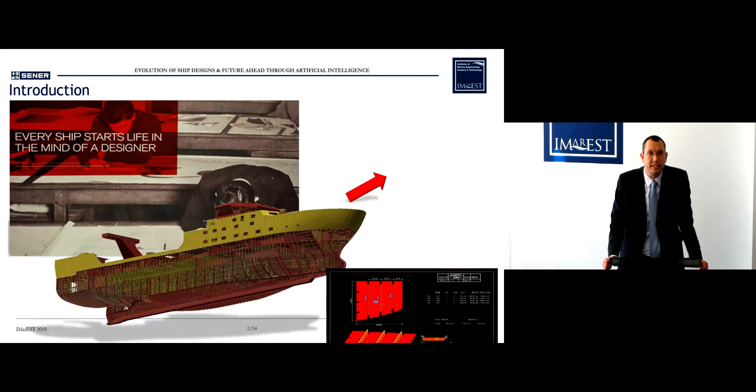The first thing I would like to mention is this slide, where I have a picture I took years ago in the Irvine Maritime Museum, close to Glasgow. In this picture it's stated that every ship starts life in the mind of a designer. I think this is the main objective of all the people attending this topic. All of us know how a ship needs to be designed, and the only thing we require is software in order to design in the best way this ship, boat, offshore platform, whatever structure we are going to design.

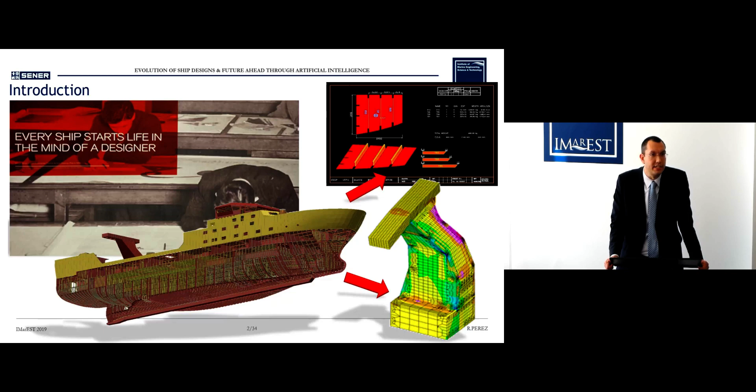So for current design, here we have people attending who are experts in finite element methods. Here we have a complete ship designed through software where we can see all the pieces, and all the bill of materials can be exported to a finite element solver. It can also generate all the outputs. So this is the traditional, current way to do things in the shipyard.

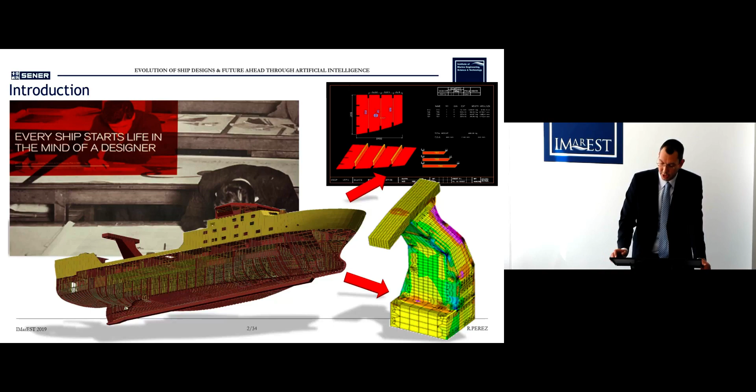So the aim of this presentation is to explain what the future is in terms of ship design. I'm going to try to carry out the presentation as quickly as possible in order to allow you some time for questions and debate.

So we are going to start with the past. Probably some of you recognize this photo I took in Portsmouth. Most of you recognize that it's the Mary Rose. Here we can see some of the elements that constitute the shell of the Mary Rose. So in the past, ship design was carried out through the experience of the master and the apprentices.

Here, for example, I have stated that the father of naval architecture, I consider, is Pierre de Bouguer, who in 1746 published the first book of naval architecture. It was the one called Traité du Navire, which, among other achievements, first explained the use of the metacenter as the measure for a ship's stability. This was the first person that started defining some aspects of ship design.

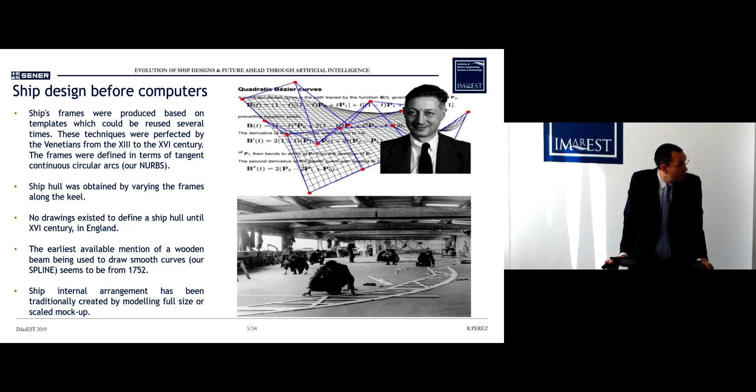So the right bottom picture is one I took from an old shipyard. It's the lofting room, where people could generate, I think this photo is from the first part of the 20th century, where they designed the ships at a scale of 1:1.

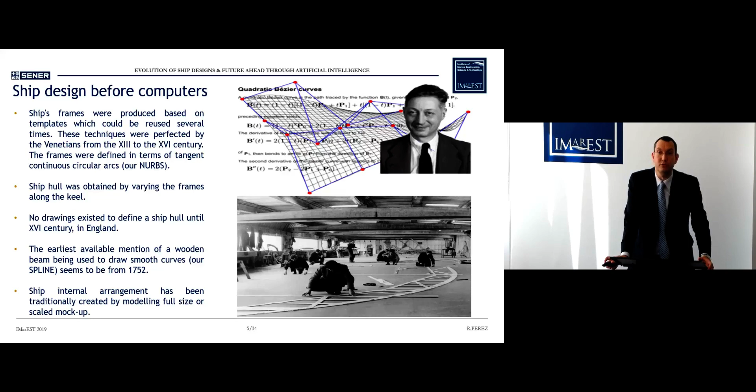Later on, as ships started being built bigger and bigger, they started using other scales, 1:10, 1:5, and there came a moment when there was not enough space to define all the lines of the ship, so they started using computers. So the first steps in the use of computers for ship design, we can say, have not been easy. I think the development of this technology has been moving through the years along with the technology of computers.

Probably some of the attendants here remember the blind punch cards and the magnetic tapes that were used in order to interact with the computer. It was in the 60s, 70s, where the interaction with the user was through punching cards or magnetic tapes.

The graphical user interface, videographic, computer-generated pictures, were from the late 70s, beginning of the 1980s, where people started defining the shape through a mouse and through an interface, alphanumerical interface through the computer.

In the 80s, they started using databases with easy-to-use modern access databases, with early search engines, spreadsheets, drawing programs. In the late 80s and beginning of the 90s, we have the birth of the numerical control machines.

This photo I took in another museum, where it was an example of a mock-up, a scale mock-up of an engine room from a vessel, defined at the beginning of the 19th century. As you can see, all the man-hours devoted in order to get a mock-up.

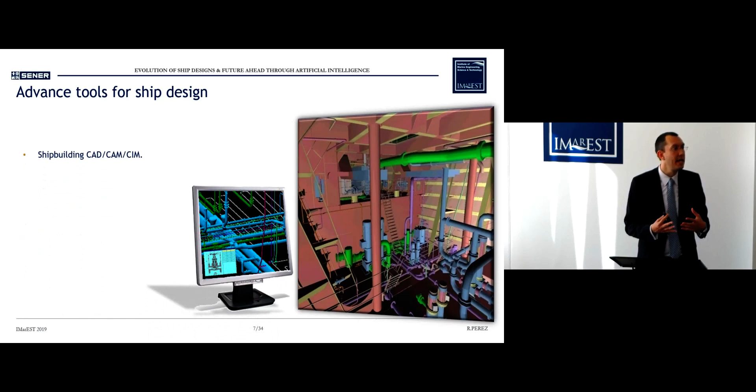This mock-up right now is something simple to create and managed by the technical offices. So the question we need to ask is why the technical offices and the shipyards are using software in order to develop the ship design.

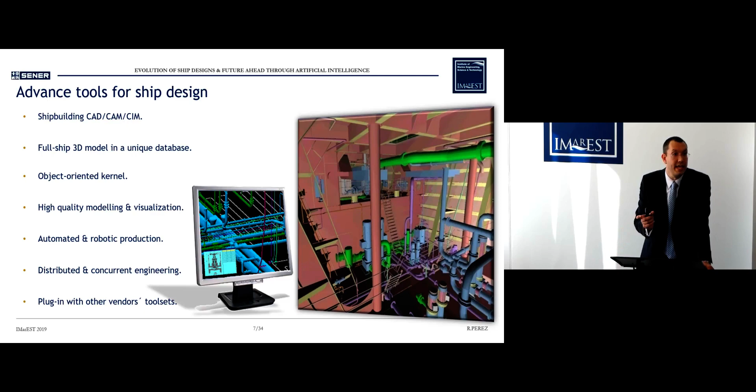So we can say that the aim of the advanced tools for ship design includes computer aided design and manufacturing. They are also engineering softwares used to manufacture all the information that we can get from the 3D model. We can have the full ship in 3D in a unique database in order to get access to all disciplines and have all the accuracy that we get from the data.

We have also object oriented kernel. We have also distributed databases. We have several advantages in the way we use the CAD system.

We have also high quality modeling and visualization, automatic and robot production in order to send information to the CNC, the control numerical machines, the bending machines, all the information that needs to be manufactured in the workshops. We can also have distributed and concurrent engineering.

In the past, the shipyard produced everything, from the engines to the ship itself. But right now, the shipyards try to reduce fixed costs and they subcontract almost everything. So now there are several actors playing the same game. We have ship owners, technical offices, shipyards, classification societies. All of them need to work in a collaborative environment, and this collaborative environment is done through concurrent engineering.

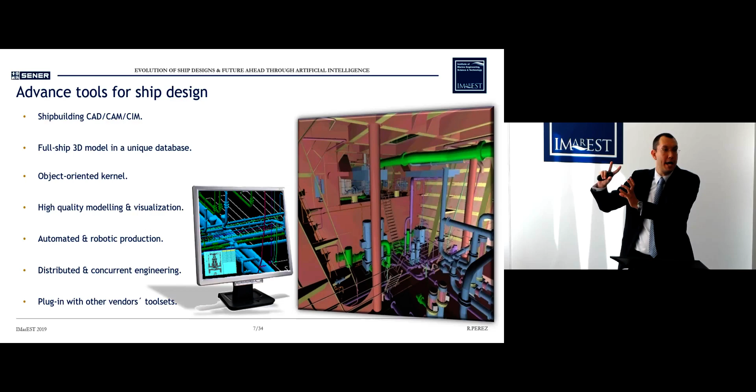It's also required by the software to have plugins with other CAD vendors in order to export to another finite element method solver. We can also generate information through fluid dynamics or computational fluid dynamics software. So we need to interact with each other. This is why we have advanced tools in order to design the different ships.

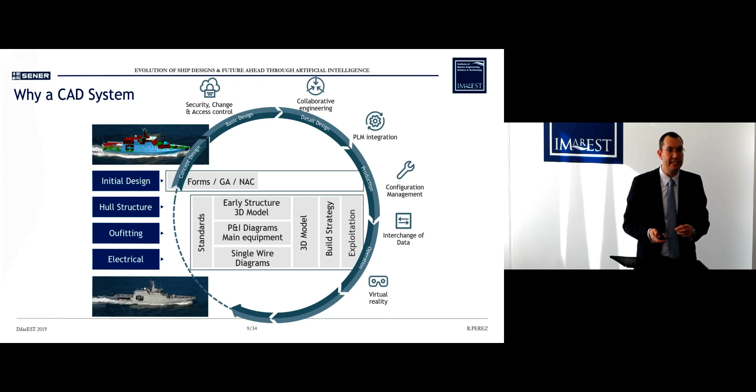So something that is quite important in the ship design is to get the outputs. In this slide, I have tried to put all the different outputs that we get from the different stages of the ship design, starting from the initial and concept design, through maintenance and operations, through all the basic design, detail design and production. The different design stages, depending on the country that we are, could change.

In Asia, in South Korea, for example, they name differently. What for us is the detail design, for them will be another type of the ship design. But here I have tried to place all the different stages of the ship design.

So from the initial design processes, we can generate from the hull forms all the damage stability criteria. We can define also the hydrodynamic analysis, intact stability analysis, power estimation, launching information.

We have from the basic design, we can generate all the major steel surfaces. We can also generate the general arrangement. We can generate also the classification information, the classification drawings for the classification societies. So in the detail design, we can generate the assemblies, we can generate the spools, isometrics.

So at the end, through the different ship design stages, we can generate all the information, always using software. I do not know any shipyard in the world that is not using software right now. All of them use software because it's the quickest and cheapest way in order to generate all the information for the ship design of the vessel.

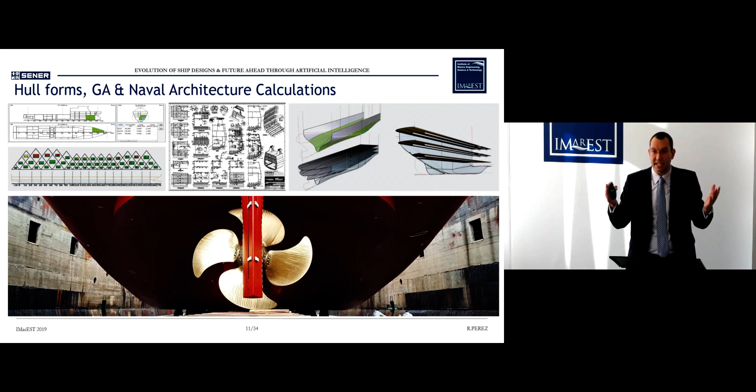So very quickly we can generate some of the information to produce the vessel, from the damage stability criteria on the left to the classification drawings to be classified by the classification society, and generate the hull forms. We can generate the structure, the outfitting, the electrical, in order to get a complete 3D model.

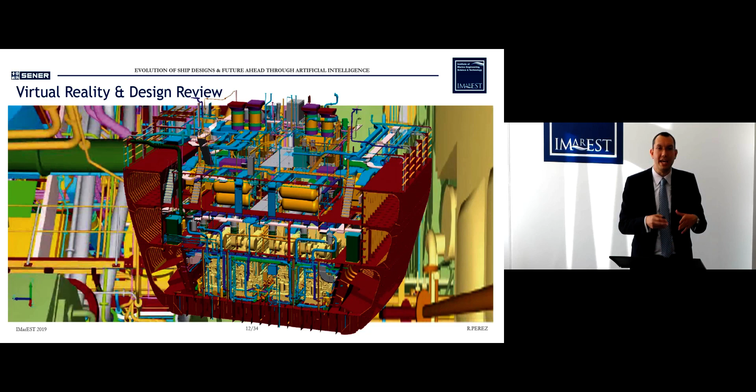In this 3D model we can interact with different elements and get the information that we require. We have also the virtual reality softwares in order to access the data in a simplified manner, with glasses, gloves, we can interact with the model, we can do some training, we can detect some errors, we can do the design review through these software applications, so we can handle all the information in a very easy manner.

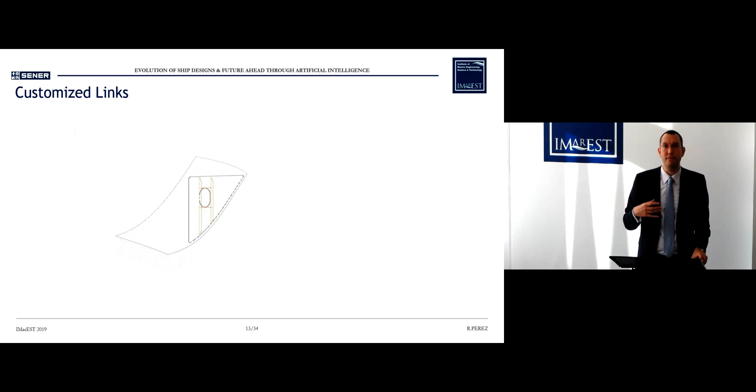As regards the ship design, we have also generated customized links in terms of generating information. Here is an example that I have created in order to see how we generated the information. We start generating the hull forms.

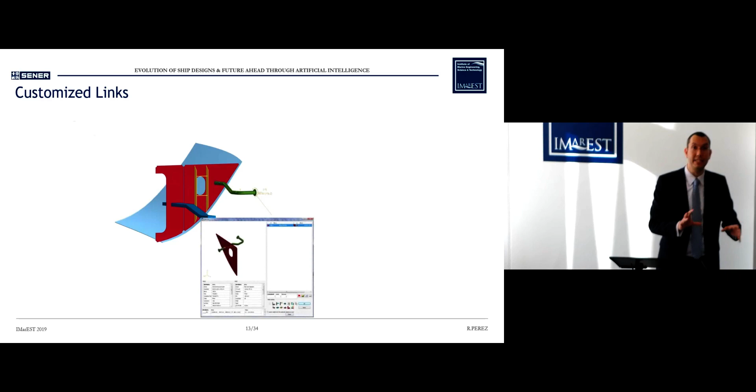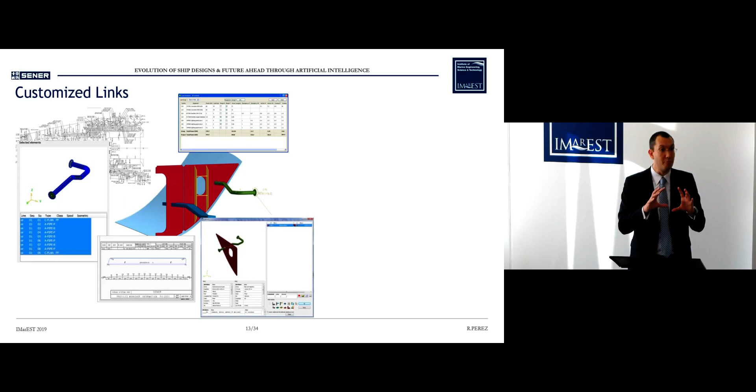After that we generate the shell, we generate the shell plates, we can generate frames, we can generate transversal stiffeners, we can generate information from the pipelines, from the HVAC ducts, we can generate clashes, collisions, automatically generate the penetration in order to allow a pipeline to penetrate into a watertight bulkhead.

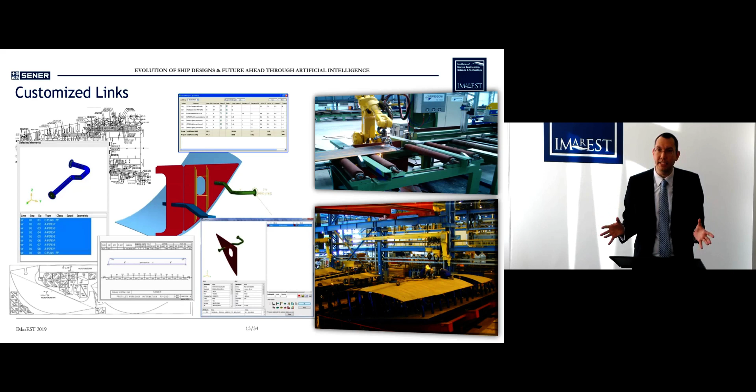We can generate the spools, isometrics, the nesting information, the profile sketch. We can generate the arrangements of the data. We can also generate all the bill of materials, all the information required for the CNC machines, and also information for bending machines or manufacturing the rest of the vessel. So this is currently how we get in the software and how we can manipulate information as it is shown.

So I need to go quite quickly. If we need to say what is the traditional way of working in terms of generating this information, we can say that right now the paper is vital, it's mandatory to generate this information. And what is the problem right now?

We have the technical office generate the 3D mock-up. This technical office sends to the workshop the different outputs, and the people in the workshop manufacture the vessel. What happens? Someone, the project manager, can realize that there is a problem between the mock-up and the outputs and the information that we have.

And sometimes, what is the problem? That someone is very angry because they consider that they have made a mistake. So there are mistakes that can produce a delay in the delivery of the vessel, and also it can be a high cost in terms of building the ship.

So what is in this case the consideration of the future? That probably the paper is not going to be vital, it's going to be a paperless design. We are going to generate the information using the new technologies. So the next part of the presentation is going to be about the future and embedding artificial intelligence inside the software.

So the first thing that we need to mention about the future is some words from Stephen Hawking. I think that was his last presentation in 2017 before he passed away. It was in Lisbon. If some of you remember, he was not physically in Lisbon, he was like a hologram that provided the conference, and he said that perhaps we should all stop for a moment and focus not only on making our artificial intelligence better and more successful, but also on the benefit of humanity.

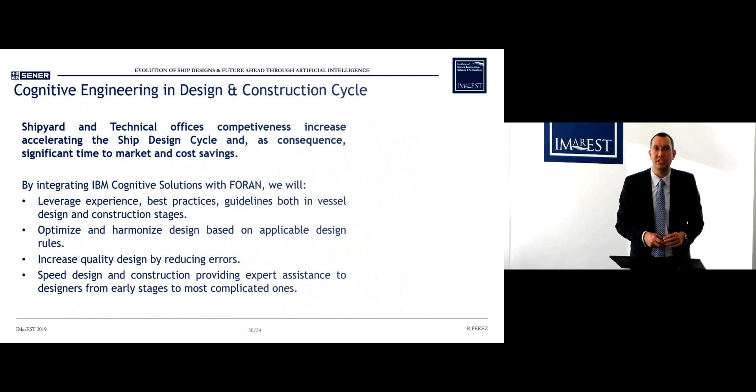At the end, this is probably quite high level, understanding what is required. Here is what we consider needs to be the definition of cognitive engineering in the ship design and construction cycle. The shipyard and technical offices, competitiveness increase, accelerating the ship design cycle, and as a consequence, significant time to market and cost saving.

How to do this? By integrating IBM Cognitive Solutions with FORAN. We will leverage experience, best practices, guidelines, both in vessel design and construction stages, also optimize and harmonize the design based on applicable design rules, increase quality design by reducing errors, and speed design and construction provides expert assistance to the designer from the early stages to the most complicated ones.

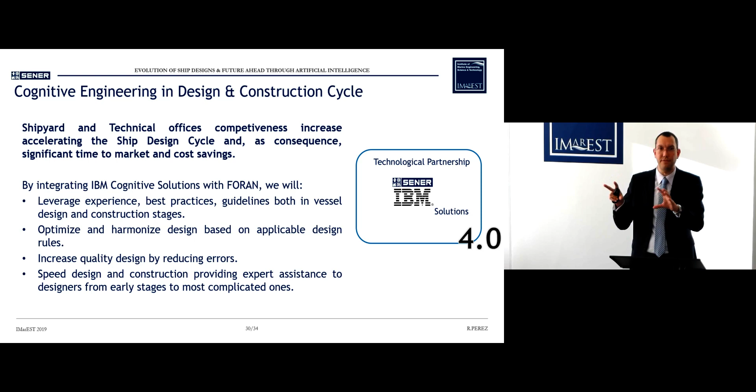So at the end, as a summary of what is expected in the use of ship design into the CAD/CAM/CIM softwares, we can say that we need to start with some examples. So some of you may say, at the end, what is artificial intelligence going to provide to me if I am working in a technical office or in a shipyard?

Mitigate the user errors. So something that we are noticing is that there are many user errors when they are operating with the software. There are problems being placed into the 3D mockup because the user does not know correctly what the classification society rules, ship owner rules, or shipyard rules are. So companies are increasingly hiring lower trained personnel.

This could be, of course, some of you may have the same opinion or not, due to high demand and lack of qualified staff. The objective, the solution, will consist of an integration of cognitive capabilities within the CAD application to provide users with available knowledge for naval design integrated with the system, with the CAD, with the software.

This includes use of the applications, applicable design rules, and lessons learned, best practices, also unexpected behavior of the software and new functionalities provided by the tools, different assets. The activity mode could be two modes: one is passive, as we will see later, or the interactive one.